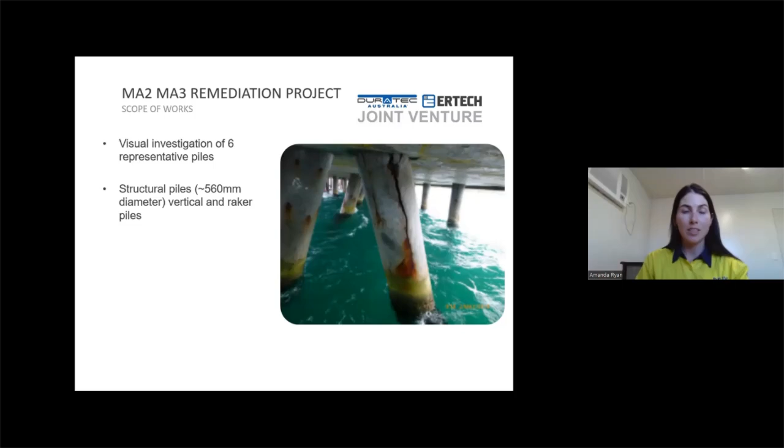In the first picture here, you will see a pile defect found during our survey. A visual and delamination survey was undertaken on every pile. As you can see in the photo on the right, this is where the delamination occurred. Large areas on the concrete surface of the pile were delaminated, and here we found defects exhibiting alkali-silica reaction.

You may ask, what is alkali-silica reaction? Well, it's most commonly known as what you've probably heard of as concrete cancer. It's a swelling reaction that occurs over time in the reinforcement. As it swells, it causes the concrete outside it to crack, letting air and moisture in, and deteriorating the reinforcement structure further.

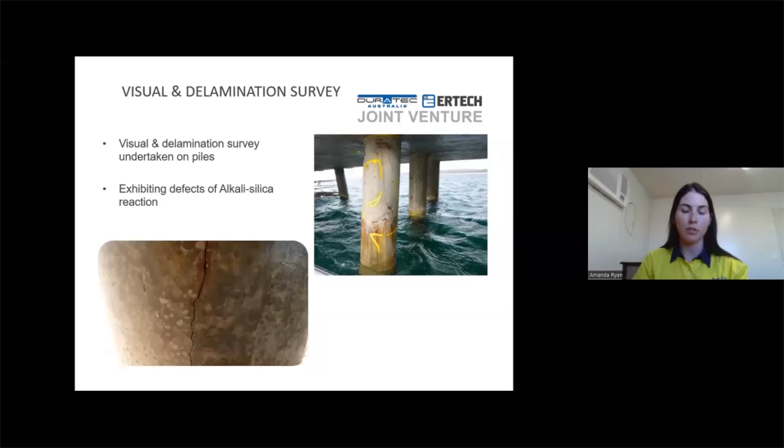So for the pile condition, in general, the cracks noted were a lot wider than 0.3 millimeter, which is quite wide for a crack. They like to say anything above 0.2 should be remediated or repaired, so our cracks were quite large. They were found towards the soffit, with an average length of about 2 meters. Spalling locations were relatively all around the cracks, and localized rust staining, as you can see from the photos, was also around the cracks.

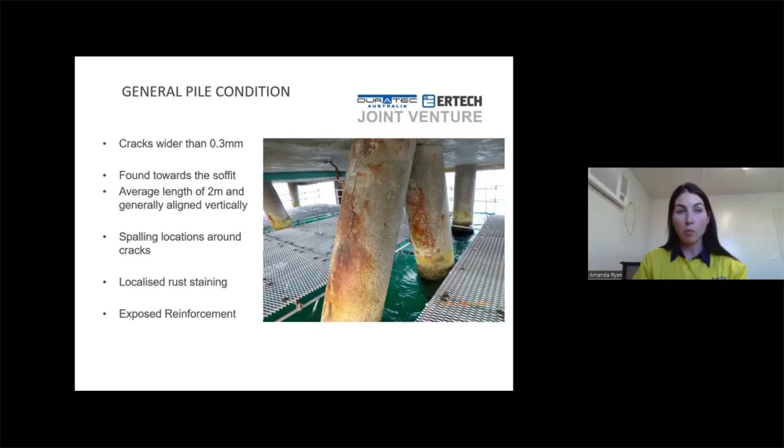In some areas, there's even exposed reinforcement. For the pile condition, this photo here shows etching that exposed the aggregates, as deep as 20 millimeters, were exposed. And here on various piles, it showed carbonation and chloride ingress.

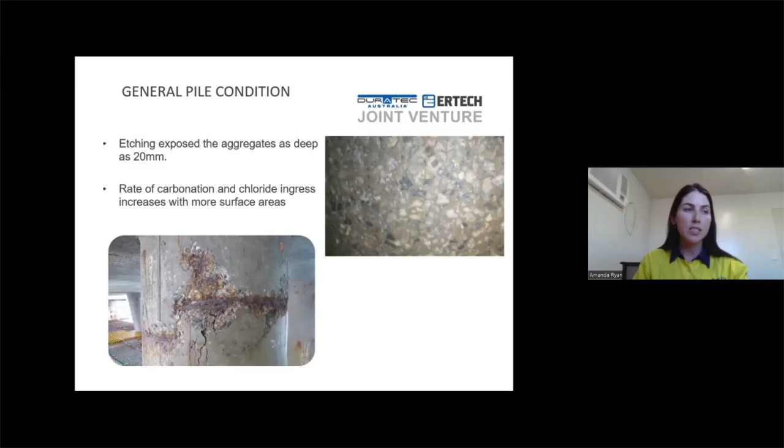Carbonation of concrete is a chemical reaction between carbon dioxide in the air and calcium hydroxide. It's mainly when the passive layer breaks down due to the carbonation that the bond between the steel and the concrete is broken. So we did a further inspection on the piles.

So removing the concrete, we did a concrete breakout, exposing the steel, and then we undertook a non-destructive test called a UT test, ultrasonic test. It was taken on 8 spots. Measurements were taken along the pile circumference and equally spaced locations. And with the results from this, we proposed it to the client, and they proposed a repair for each pile.

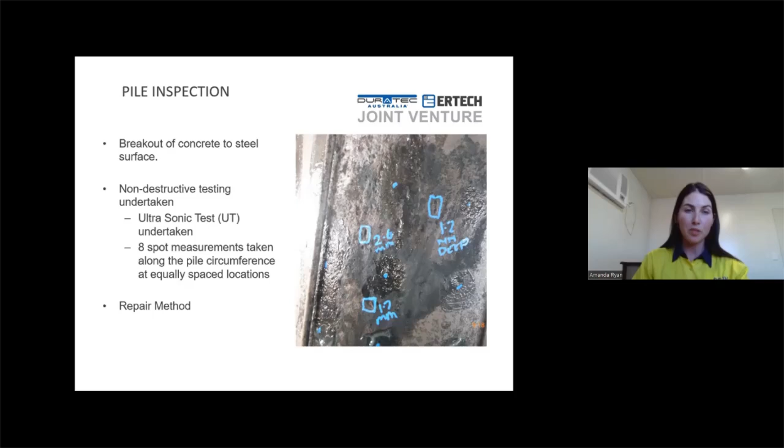There were 2 repair methods proposed depending on the delamination of each pile. For the first repair method, it involved a minor breakout of the delamination area. So we broke back the concrete to the exposed steel.

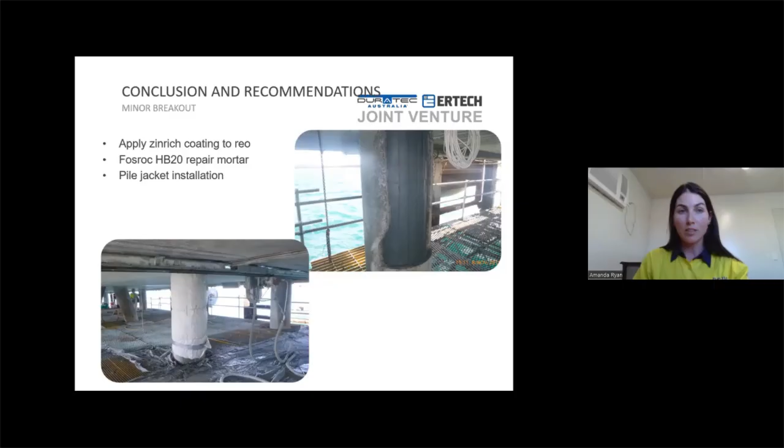We then coated the steel with a zinc-rich coating. This is what this grey paint looks like here. Then we formed it with formwork, and we poured a repair mortar known as Fosroc HB20. This photo shows the repair mortar when it's curing. So it cured for its required amount of time, and then we installed a pile jacket. I'll go through the installation of the pile jacket in the next slide.

For larger breakout areas, we once again broke back the concrete to the bare steel, and this time where the steel was that deteriorated, we couldn't just apply the zinc-rich primer. We had to do further repair methods, so we had to steel strengthen the pile. We installed a 12 millimeter steel plate to the pile, which is this, fitted to the radius of the pile, and fully welded, 8 millimeter fully weld on every side.

And then over that, we installed the pile jacket. The pile jacket installation consists of, it's like marine piling paint, I think, or petroleum-based primer, it's known as. It's almost like a really sticky paint. You paint it onto the whole surface of the pile, and then you wrap it in pile protective tape, which is this section here, and then you apply the jacket.

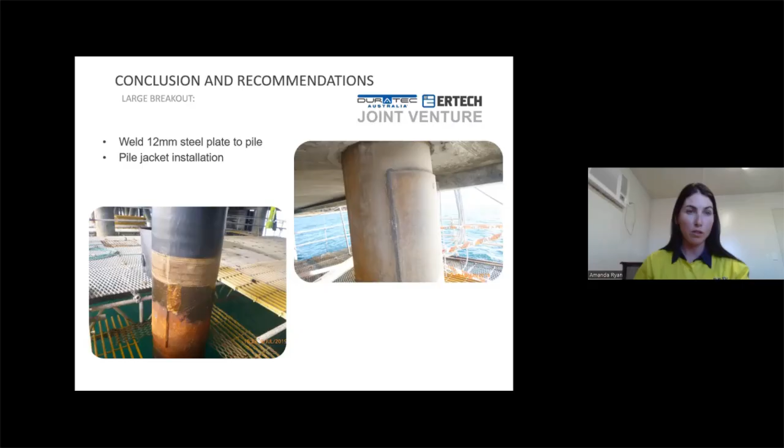So the jacket is installed using a hydraulic jack. That was completed to all the piles that had those steel plates. This shows the jacket itself in full. This is one of the raker piles that were remediated, and this just shows the top, and here are the bolts that go through.

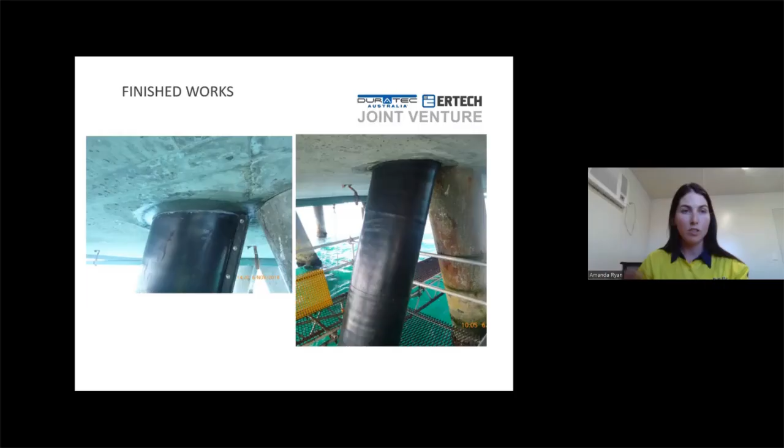You basically wrap it around the circumference of the pile, put the bolts through, and use a hydraulic jack to tighten it. When you tighten it, the jacket actually pulls down a bit, because it tightens, so you're left with almost a 10-20 mil gap from the soffit. So we install what's known as almost like a sealant on the top, just so no water ingress is able to get into that area.

So that was that project. The next one I worked on was a wharf project, so wharf construction. It was a joint venture with Ertech, and the scope of works was to supply, fabricate, and place reinforcement, supply, mix, test, place, and cure concrete to specification in a marine environment.

Started this project in 2020, and due to the duration of the project, we'd be pouring some concrete pours in the summer months. There were a number of restrictions within the specification that we had to take into account and acknowledge, and the first one was about temperature and limits on evaporation.

Some of the specifications and limits were: the concrete cannot be poured if temperature was less than 10 degrees or exceeded 32 degrees Celsius. If the ambient air temperature was greater than 38 degrees, if there was heavy rain, or if wind conditions exceeded 10 kilometers an hour, we had to put a windbreaking system in place, which was the majority of the summer. There always had to be a windbreaking system in place because we were highly exposed out in the ocean. We had some high winds come through there, often getting up to even 50k.

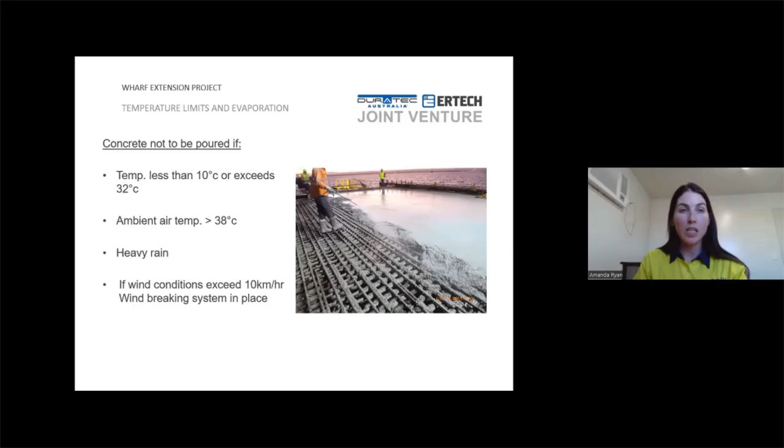So for the mix design, we did a mixed design trial, and the requirement for durability dictated the need to try different binder regimes. We included silica fume in the mix to assist with the slump and workability, and overall, using silica fume, more chemicals are required. We received a lower slump, and the risk of crusting due to harsh environment was more pronounced in the silica fume mix. We also exhibited jelly set, which you can see here, which is cracks forming when the concrete is still in its plastic state.

And the mix with silica fume was a lot more challenging to obtain any desired finish, and it required extra troweling and a lot more curing time and effort.

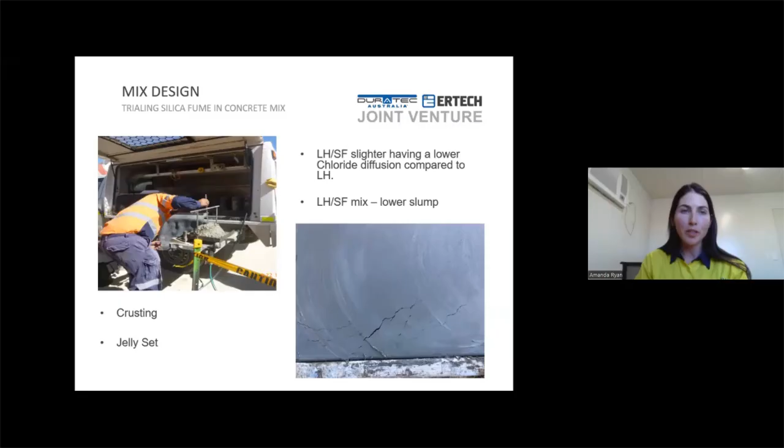This was the mix without silica fume. This low heat mix definitely had a desired slump. We exhibited no jelly setting, no visible cracking, and the bleed characteristics allowed DEJV to obtain a desired finish. It was easier to trowel and easier to broom, which is this photo here, a broom finish, which is the requirement for our slab.

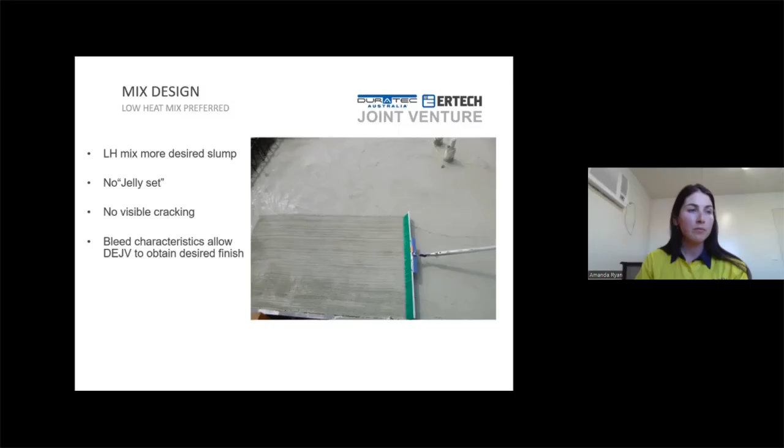Heat of hydration - how to monitor the heat in the concrete, especially in the larger pours. Within the spec requirement, we were to monitor larger pours, and larger pours were considered where one face of the slab was larger than 1 meter.

To do this, I installed temperature sensors from a company called SmartRock, or Giatec SmartRock sensors. Basically, you download an app on your phone, the SmartRock app, and install the sensors in the rebar at 3 different locations - one 300 mil from the bottom, one in the middle, and one 300 mil down from the top. So we're getting the bottom, middle, and top temperatures throughout the concrete, monitored every 30 minutes for 120 hours.

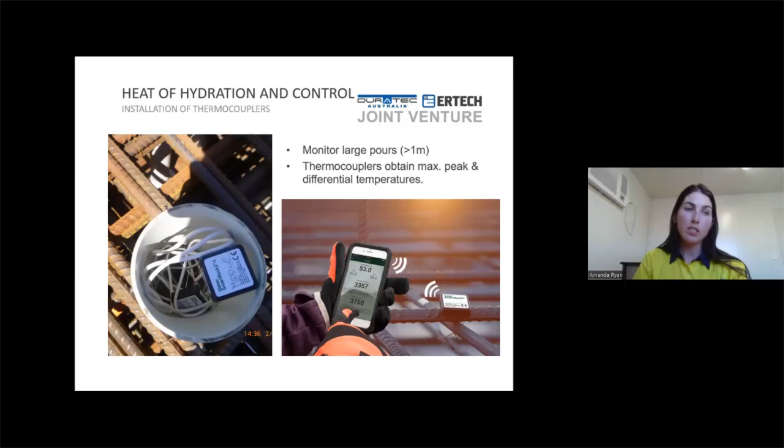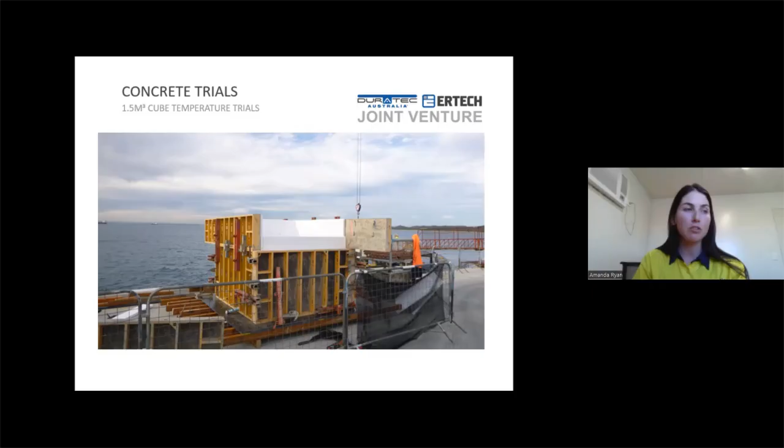For our pours, the core of the slab, the specification requirement was for the core not to exceed 75 degrees Celsius, and the differential between the core and external surface not to exceed 25 degrees Celsius. So we did a couple of trials to ensure we were going to achieve this. We did 3 trials in total, conducted for large pours, to determine the critical conditions met by appropriate measures of controlling heat in the concrete.

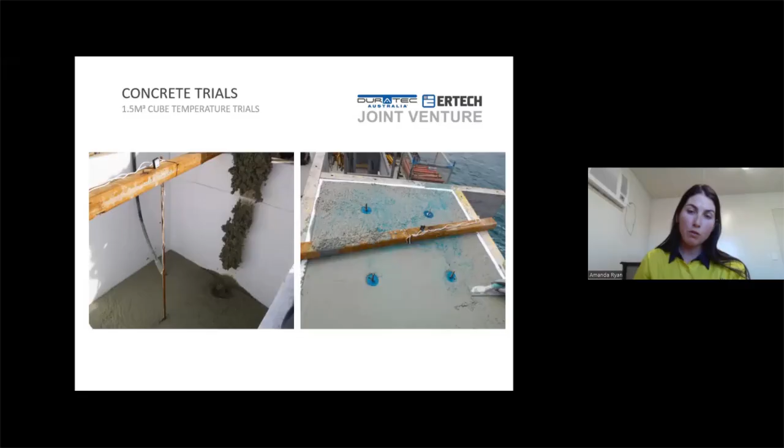So here we have insulated forms. We did a 1.5 by 1.5 cube with insulated forms, single ply on the bottom, and sides insulated with expanded polystyrene sheets. Temperature probes were installed, top cured with aliphatic alcohol, which is this blue liquid, and then trowel finished, which you can just see here.

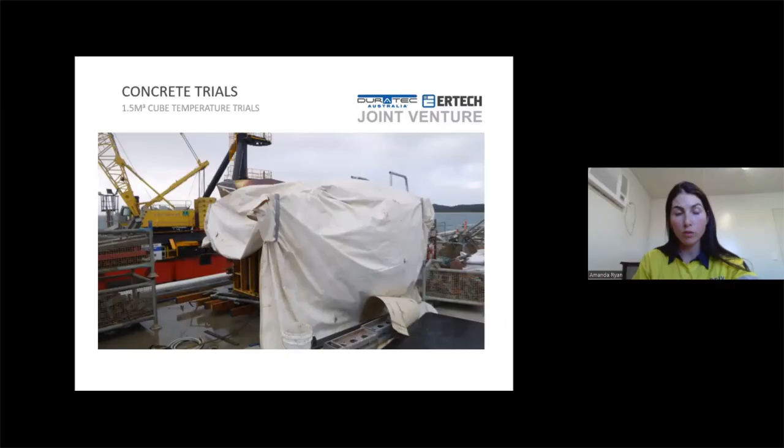And this is the curing - we left it to cure for 14 days with water running for 14 days. So it was water cured.

And here are the results. So once you download all your results from the app for the temperature probes, you get a spreadsheet, and this is what it shows. The bottom probe is this middle line here, the top probe is this blue line, and the middle probe, which has the expected highest temperature, is this one. And this is your ambient temperature.

So the trial was successful, with a max temperature of 68 degrees Celsius, and the max internal temperature differential was 13.9 degrees Celsius. Our ambient temperature at that time was 19.3 degrees Celsius, and our slump was 160.

The trial had Hessian and sprinklers on, with reflective insulation and tarpaulin on top during the curing period. This was undertaken on the 24th of June, and all the data was downloaded after 120 hours.

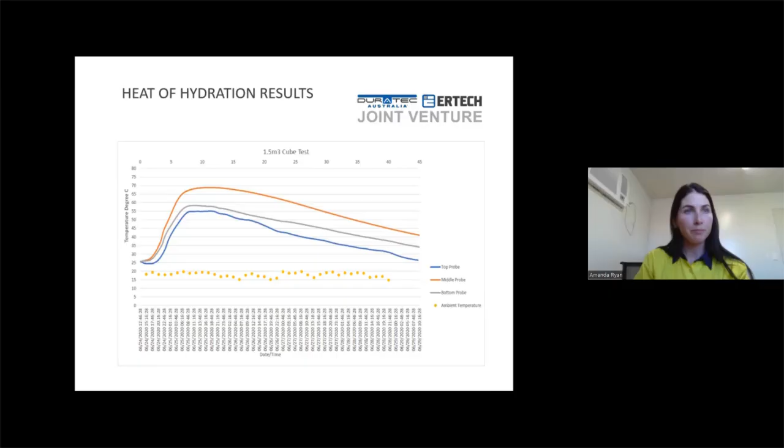So next we decided to trial with ice. In case we got really high temperatures, we wanted to ensure we had a backup plan, so we thought we'd trial the mix with ice. Due to the timing, the concrete was placed in summer months, where temperature monitoring had to be conducted during this period.

I think it was a week of 35 degree Celsius days, which was concerning. So you have to consider all the materials that go into the mix - they're left out in the heat, not always covered, not always sprinkled with water 24/7. So sometimes the materials in the summer months are a lot hotter, a lot warmer, and you have to take that into account as well as the ambient temperature.

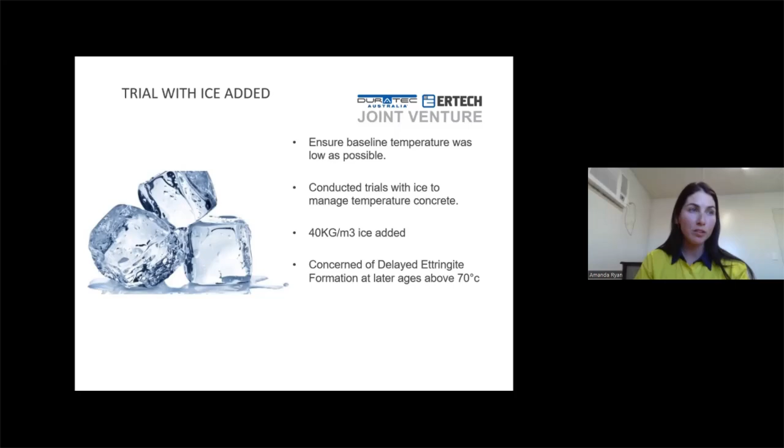Unfortunately, the trial with ice was not satisfactory, due to the chemical reaction with the additives. Our mix design was a specific mix, not your standard average - it's a very specified mix with a lot of additives in it, including a material known as Xypex. That reaction with the additives and ice just wasn't happy - it didn't work, and unfortunately we got a delayed reaction on the slump.

As you can see here, it's a pretty low slump, as our slump specification was 160 plus or minus 40. This slump, I think I remember, is 80 mil, which is way out of spec.

So the addition of water within the allowable limits had no effect. When the concrete comes to site, you have X amount of water left over that you can use to adjust the slump, whichever way you need to. Usually with our mix, we'd have approximately 60 litres of water left over, and even adding 6 litres of water into a 6 meter cube truck didn't make much difference. We didn't even get the slump specification. So yeah, it was a bit of a failure.

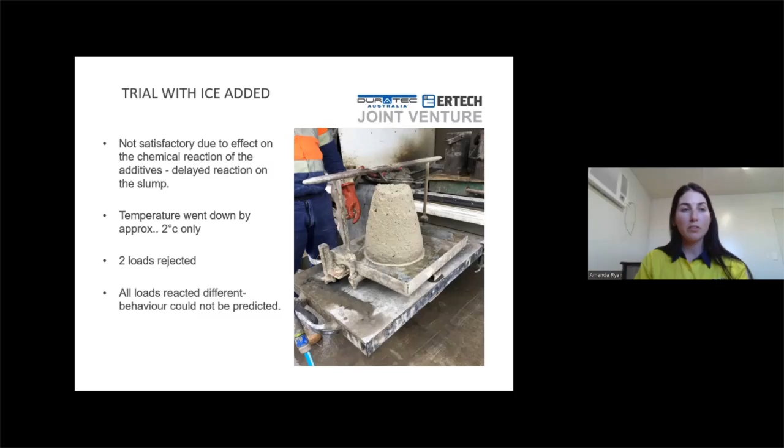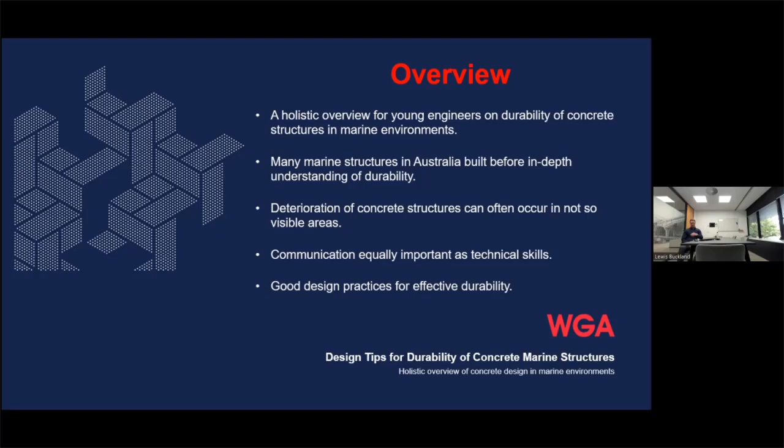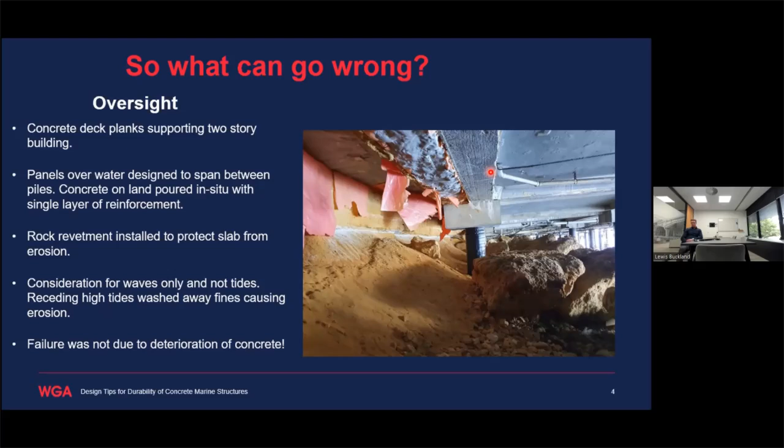So I think it's an interesting one because failure was not due to the actual concrete itself. Everything was done correctly, yet the oversight for the lack of consideration of the tides shows that durability can be in that bigger picture side of things. So that's one there.

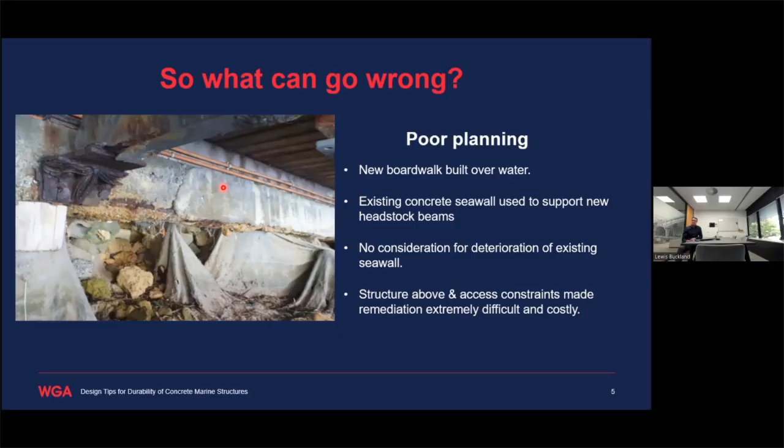So we'll go to the next one.

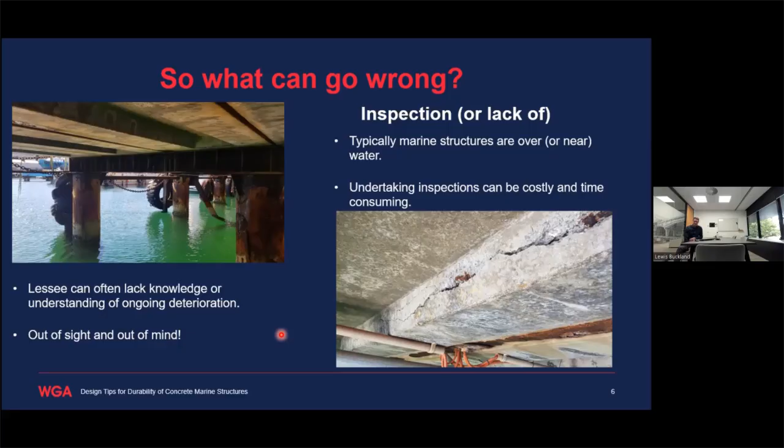This is a real-world example to bring it up. If everyone remembers back to October 2018, a place called Rottnest - I'm sure everyone's heard of it for a holiday, get a selfie with a quokka - they actually had a major failure back in 2018.

For me, this was a real wake-up call. It was very early on in my career when this happened, and it resonated with me that it's not like these things can't happen. This did happen, and it was really lucky there weren't serious consequences, but it was pretty bad. It's just more reason for durability being something to consider and take really seriously.

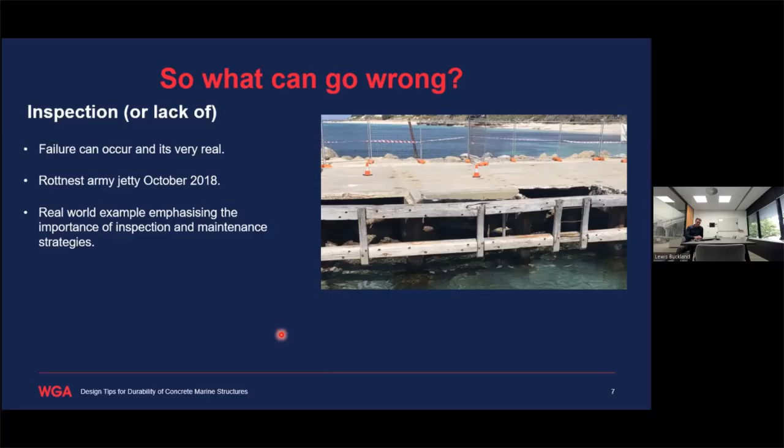Which leads on to the lessons learned piece that I'll try to cover here. I wanted to touch on the slides I talked about before - what the lessons learned were for the remediation pieces we had to do was, well, they were quite difficult.

They were really hard to get to. We were also in positions where the client didn't want to throw ridiculous amounts of money at it. There was a piece around what their long-term plans were for the buildings in the area, and we had to toe that fine line - we need to do something now because it's going to get worse, but equally we don't want to throw the kitchen sink at it because it's probably going to cost more than potentially just doing it again from scratch.

It was a lot of work - you can imagine the workers at the time, I probably wasn't their favorite engineer, but they did it. This is holding up now, but there's still uncertainty and ongoing conversations on what the long-term plan is, just because of that one oversight originally. It was a very cost-intensive temporary solution as well.

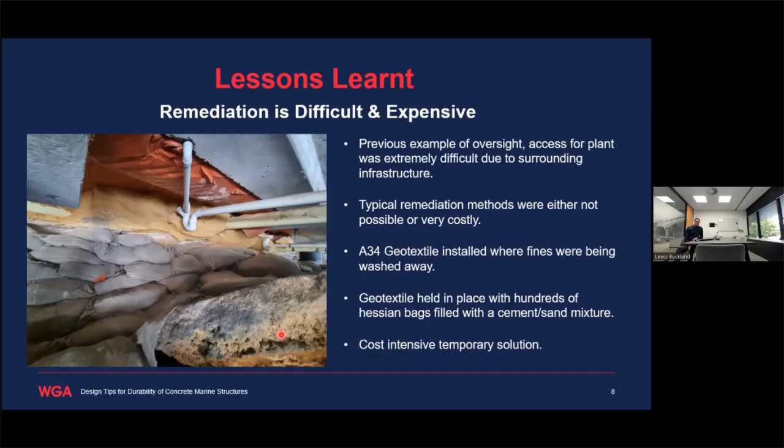Going back to the lessons learned, same problems really. There was very little we could do with the access constraints to remediate that concrete seawall, and because it was load bearing, all we could do was put in that temporary casing to take the load off the seawall for the best that we could at the time, and just buy the client some time to figure out their long-term strategies. So really what we're looking at is small things that have grown into some really large problems, and basically caused businesses to have to recalibrate their long-term plans for an area just because of some small durability constraints.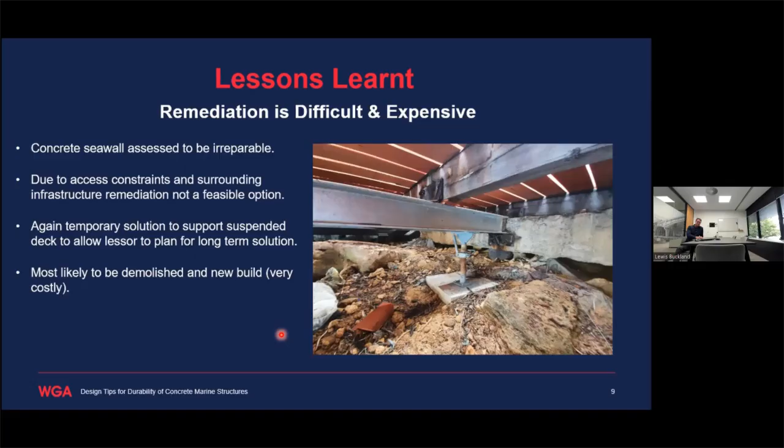So that leads on to some of the lessons learned along the way. I've got a few. The first one I wanted to talk to, probably tailored towards the younger engineers - some more experienced ones out there probably know all this stuff - is just the piece of early contractor and early client involvement. When you're a designer, or a contractor, or the client, the earlier these conversations happen between all parties, they're really powerful, and they're just a fundamental requirement.

If the designer can collaborate with the contractor to figure out what their constraints are, what their capabilities are, what they know, what their past experiences are, and how they've found things to work on previous projects, then from a design side you can implement that as well. That's a really powerful tool, and then to let the client know what's gone wrong in the life cycle and what's gone right, so the client can budget for that and plan for that. I'd say that's one of the most powerful things within getting durability right in the marine environment.

The other part is communicating the risks associated. Not that I'd show this slide to every client I met - I'd never get a job again - but really it's just showing that if you don't get the right side of durability now within your concrete mix or your concrete design, or designing around the concrete itself so it's got the ability to withstand the environment, then the costs down the track are going to be quite significant. So just letting the client know that, and really communicating it early in the piece.

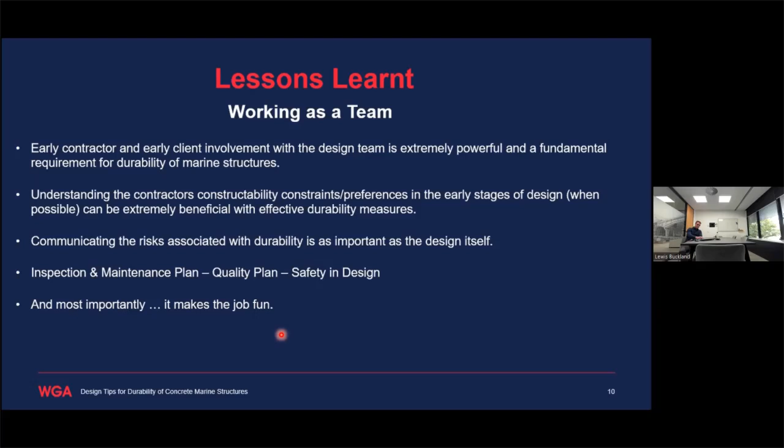I'll bring up an example here about one of my shortcomings, thankfully early on. I always just assumed concrete was poured and that was that, and it all sort of lent on the mix design, or from the design side of things how it's mixed, but never really appreciated that it needs to be pumped there, and there's constraints and limitations within pumping concrete, especially in a marine environment. You can't just drive a concrete truck out to a recently constructed wharf or whatever it might be.

I actually went to a CIA presentation where one of the guys who was a specialist in pumping concrete spoke quite in depth about some of the problems he's come along the way, and how to overcome them. That in its own right made me realize there's just so much more to getting this right than just getting that design correct originally. So I suppose that's one side of it, and that leads on to this.

Never underestimate the knowledge of the worker. They know things, and they've usually done a fair bit of it. So the more that you can chat to people about their past experiences, the more you can learn and better implement for the future. You build your network that way, and by getting to know the right people, you can really handle durability in quite a proactive sense.

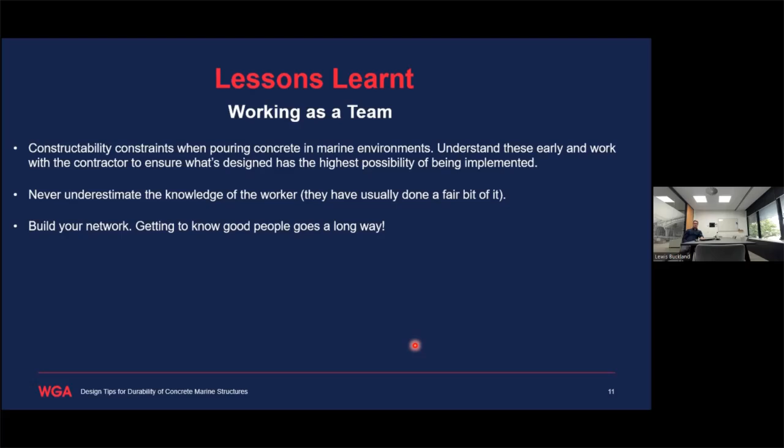So that's a high-level summary of some of the lessons that I've learned. Now I suppose what I'll do is just jump into a few little durability tips along the way that I've picked up, keeping in mind these are just from my experience. I don't use these like gospel.

Always think through the problem uniquely and how it's going to best work for anyone's specific project, whatever side you sit on in that. But the first one of these is just the power of technology these days.

We're not where we were 20, 30 years ago, where everything was done manually and scrutinously. We've got things like an ROV here, which is fantastic for investigating and inspecting underwater concrete structures, and it saves a lot of labour and man hours with the dive team. So being able to utilise these in the right environment and understanding when's the right place to use them, what their capabilities are, and when's the right time to say, that's not what I'm going to use, I'm actually going to use a dive team here because I know I'm going to get a better purchase.

And that's equal for using your drones or your UAVs. These things can get to, especially soffits on wharfs and jetties, concrete stuff like that. If you don't have the inspection vessel, what you can do with the drone in a very short amount of time is quite impressive. And then the photogrammetry piece, that's a strong work in progress.

It's really cool, and I think being up to date with all that stuff and understanding where it can be applicable for you is good, because the more you understand about the defect or the concrete, how it's acting in its environment, or what might be the factors causing the ongoing deterioration, or what might be doing really well and causing it to withstand the environmental loads, the longer it goes into getting the solution right and how you can benefit the long-term durability, whether it's that structure or one you're going to be involved in the future.

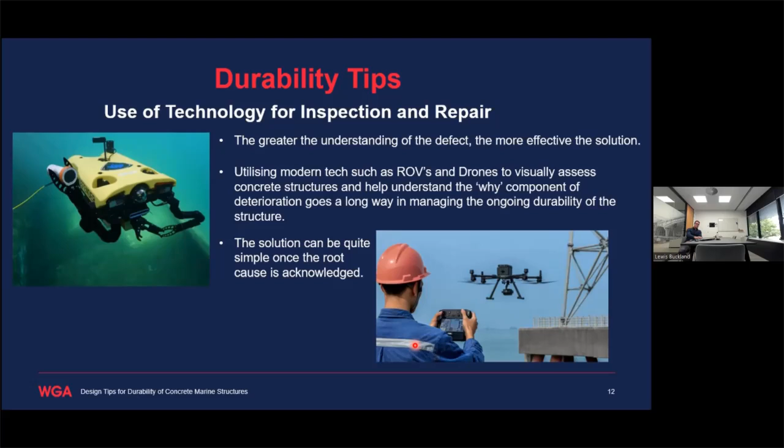The next one of these is, know your people, know the market. So just learning what products are out there and using the right product where applicable to maximise your structure's durability.

Just to name a few of them, there's so many and they're all quite incredible in their own right. But you've got your glass fibre reinforced polymer reinforcement, stainless steel reinforcement, knowing when's a really good time to use that, knowing when maybe you might have to revert back to your traditional galvanized or mild steel, or whatever it might be, and just the limitations and the strengths.

Your concrete admixtures as well, they're incredible in what they can do. Each of them probably brings something unique to the table in many respects. Same with the coatings, the resins, the epoxies, and the cathodic protection too.

One thing as well is it's not up to the engineer or whoever, or the builder, to know every single thing about one of these products, but you just need to know who to ask. So it's really good to network and find out, meet suppliers, meet specialists, and get them on board for what you're doing as well, and communicate what your problems are and let them really share their knowledge. In my experience, they've always been willing to help. And if they're not, they're probably in the wrong industry.

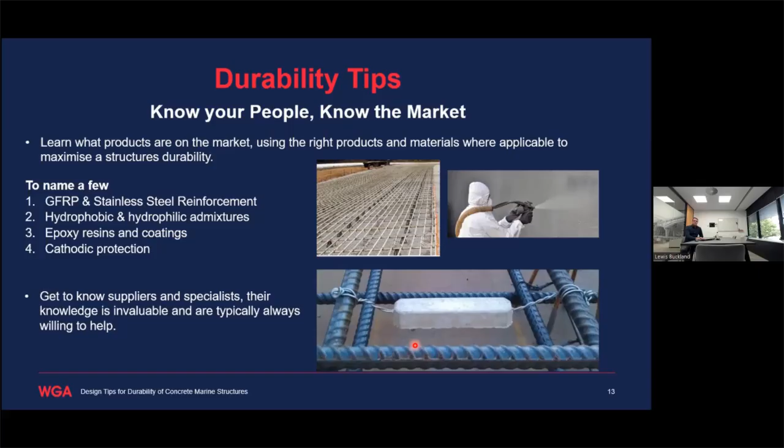The next one here is probably a bit of a design tip that I've come across a few times now. This is just one example, but again it's thinking about what can go wrong. And in this case it did go wrong, and then how that could be done better in the future, and something that you can carry forward.

So what we think happened here is something's hit this concrete on the corner, and it's sheared off the corner of the concrete. It's got no implications on the actual strength of the dolphin itself, but what it has done is completely knocked the cover off, which has then allowed for that real accelerated corrosion and chloride penetration throughout the whole element itself. So that loss of cover is not good.

But in order to mitigate that in the future, something that was talked about was fibre reinforcement - especially the little glass fibre reinforcement that you can chuck into your concrete mix - that'll increase the tensile strength over the entire element, especially in those corners. Obviously you still use your traditional bars to get your strength, but having those fibres involved as well probably would have given that corner the strength to withstand some of that floating debris, and ultimately it reduces the need to set up all the temporary works and get workers to do the remediation works required to fix that corner.

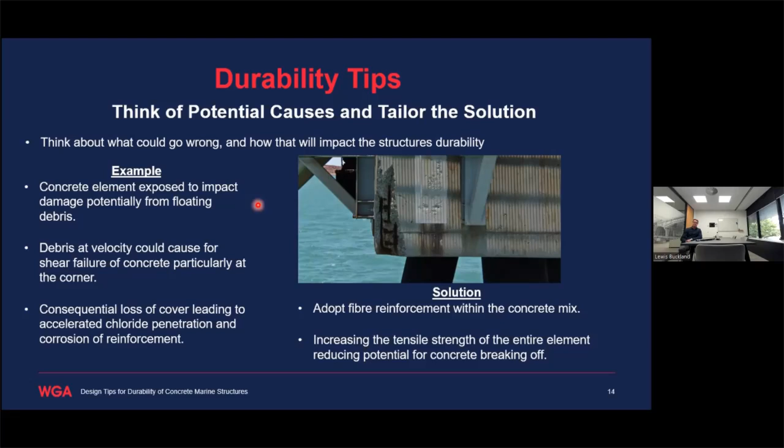So that was one that I thought was quite interesting, because it's a simple thing at the start, but it flows on with the theme I'm trying to get across here. If you carry it forward in that way of thinking, you can really mitigate a lot of these problems, and if they're communicated well, then everything does better. I think as a whole industry we can get on top of this.

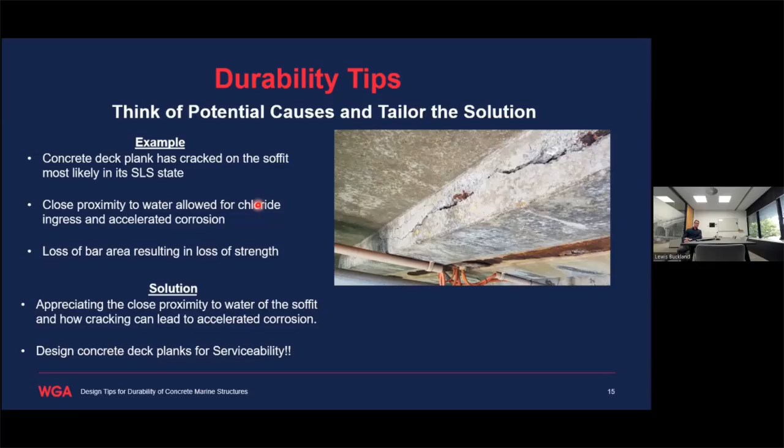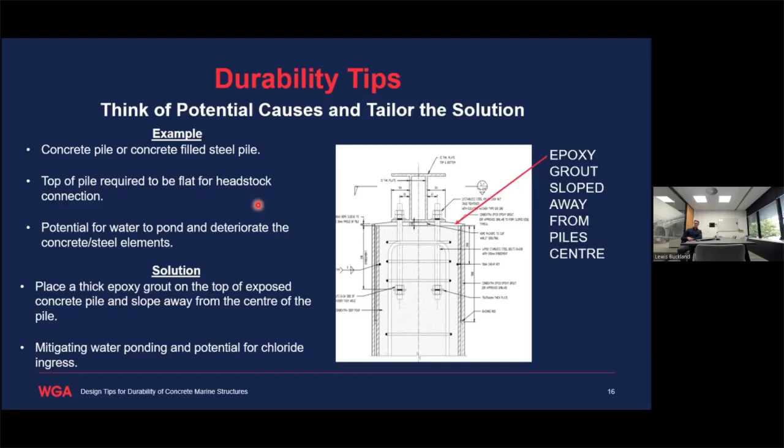But yeah, so I suppose that's really it from me. If I've raced through that, I apologize, but any questions?

Thank you very much, Lewis. Certainly, I've picked up quite a lot of tips from your presentation. I'll probably go with a Q&A session now, starting with Amanda, to give time for people to type in the questions for Lewis. So for Amanda, there's a question from Tianxing of UTS about the ASR damaged part.

Was there any evaluation of the residual strength for the ASR damaged structure? On this structure, no, there wasn't. Unfortunately, the structure itself was quite old and hadn't been maintained, hadn't been inspected for - I don't even know if they had any inspection records on this structure.

So when we were engaged, it was in quite a lot of need for repair. But looking at structures like this, you would regularly have inspections every couple of years, if not depending on the design life and the structure itself and how often it's used. But we would usually do inspections quite often. So in this circumstance, there hadn't been any inspection done on the wharf. That's why the deterioration was quite substantial.